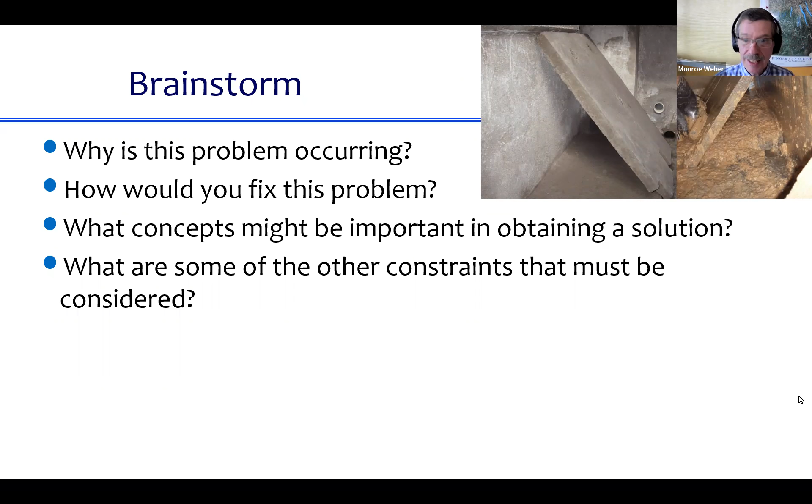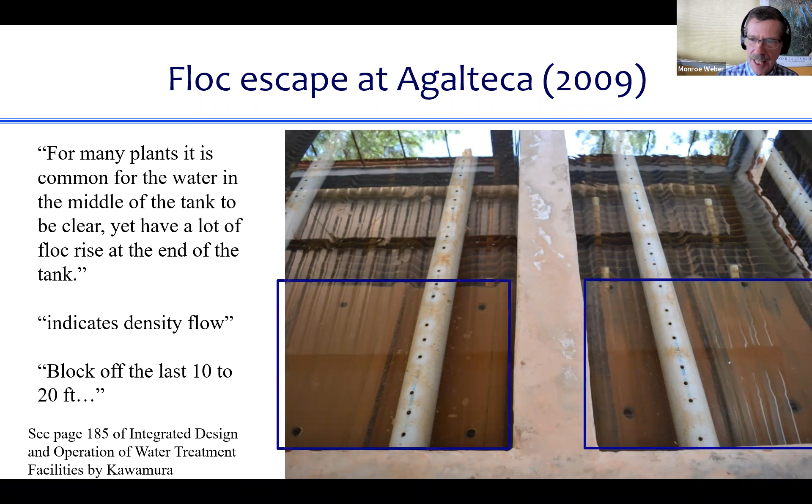So let's go on. This is another problem that happened in a water treatment plant. This is a view of the two sedimentation tanks looking in on the plate settlers at Agalteca. And the problem was that there were a lot of flocs coming up at the one end of the sedimentation tank. I know the image is not great, so I'm going to draw squares around what I want you to see. Look at what's right there. If you look really closely, that is two plate settlers laid on top of the plate settler modules, to prevent any water from coming up through those plate settlers. That's pretty puzzling, right? The reason they did this is because there were flocs coming up through those plate settlers, and so as a rational solution, they blocked the flow through those plate settlers.

And then I want to draw your attention to what I've written on the left there. For many plants, it is common for the water in the middle of the tank to be clear, yet have a lot of floc rise at the end of the tank. And that indicates density flow. And the solution is to block off the last 10 to 20 feet of the tank so that the flocs can't rise. And that comes from this textbook, which is like a top textbook used by consulting firms in designing water treatment plants today. And I want to point out that it's wrong. What happened is they assumed it was a density flow when actually it's not. But I also want to point out that this textbook recognizes this problem, and they don't actually have a solution for how to design the sed tank so that this problem doesn't occur.

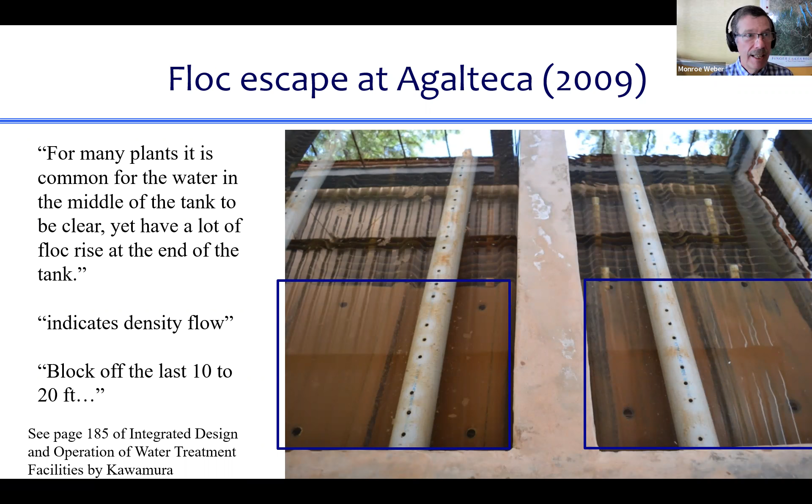So now I want to show you what we learned. We ran into this problem, and this became a student design project to try to figure out what was going wrong in this tank. They actually built a tiny little model of a sedimentation tank with the same kind of piping to get the water in and get the water out. And they ran dye through it, and there was this big aha.

I think the obvious answer is down, right? You think it goes straight down, because the holes are pointed down. That's what I thought. But the water doesn't know that that's what it's supposed to do. The water just does what's easiest. And so the water does this.

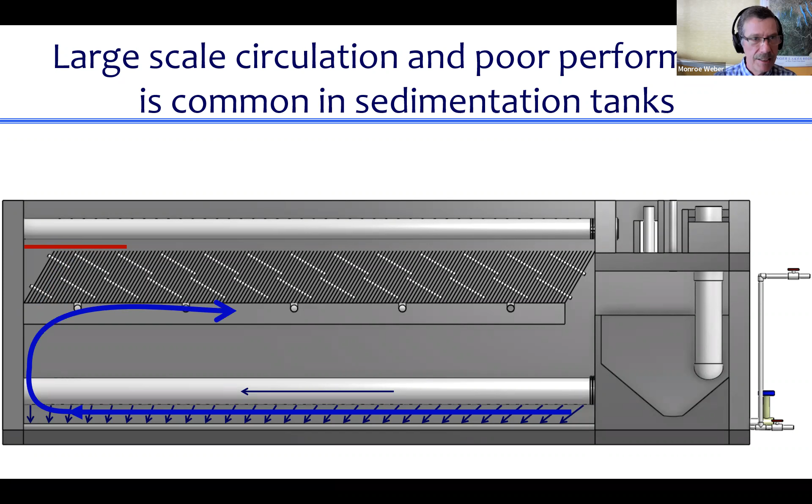And it's not about a density current, it's about kinetic energy. So, well, that's what we would like to have happen - actually no, that's what the plate does on top, but that's still a lousy solution. So the insight is that this is an inertia problem. This is an early attempt at solving this problem.

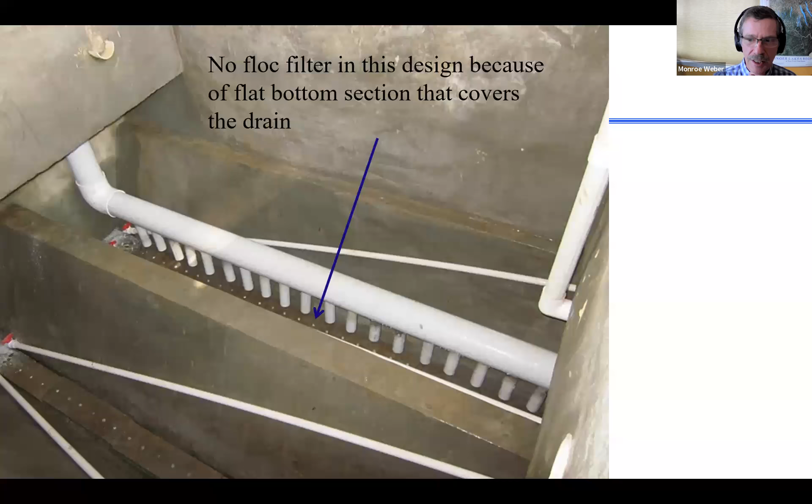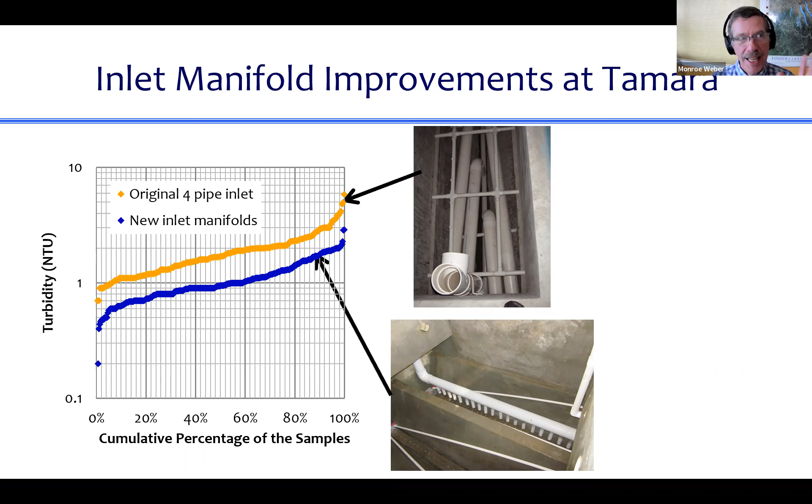So you see those straight pipes stuck on the bottom of the inlet manifold, and some early data suggesting that that switch actually improved performance of the sedimentation tank. The orange data points are from an earlier system - actually this is for an even earlier system that also had problems. Maybe the point here is that the improvements we've made did actually improve the performance of the plants.

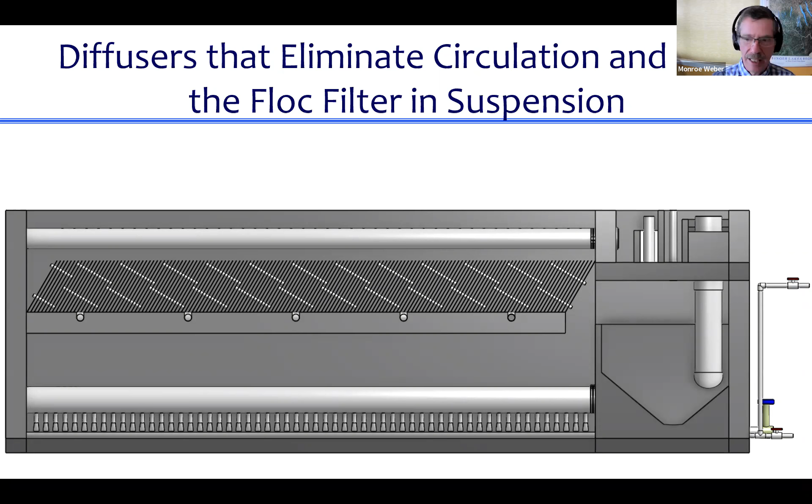This is the new design for the manifold for the inlets at the bottom of this sedimentation tank. I'll show you a couple pictures of how that's done. So the addition is those straight diffusers, pipes that straighten the flow and create a nice jet at the bottom of the sedimentation tank.

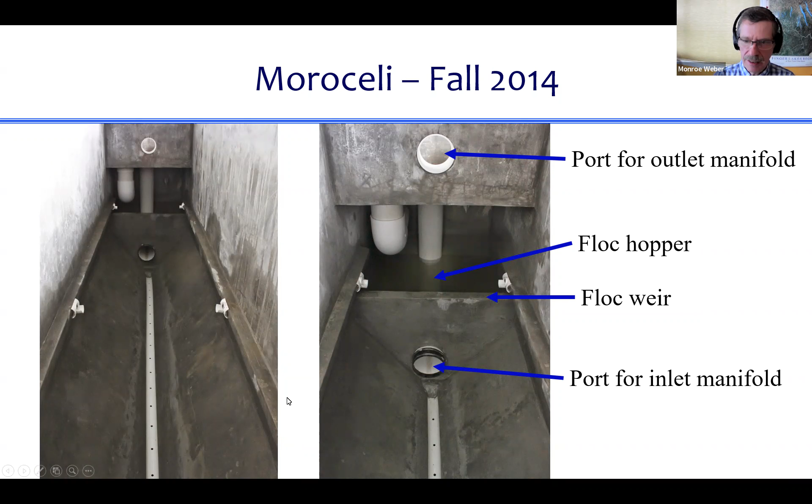So this is where the water leaves it. Let's start at the bottom. This is where the water enters the sedimentation tank, going into the inlet manifold. Here's the floc weir that controls the level of the floc filter in the bottom of the tank. Back in here is the floc hopper, where the flocs consolidate and form a liquidy sludge that's then wasted by opening up a valve.

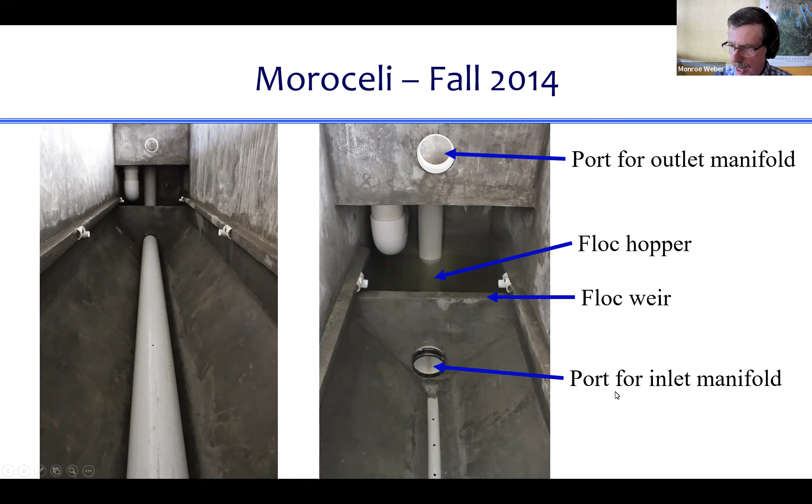And on the left you can see the whole bottom of the tank, and then I'll add the inlet manifold in here. So there's the inlet manifold added in. Let's look at how they fabricate these. So here they are fabricating one of these systems - they've got a drill press and they're drilling holes in the inlet manifold.

I'm just realizing there's holes on the other side of that inlet manifold. So this must have been a posed picture. I had never noticed this before, right? The holes are on the other side.

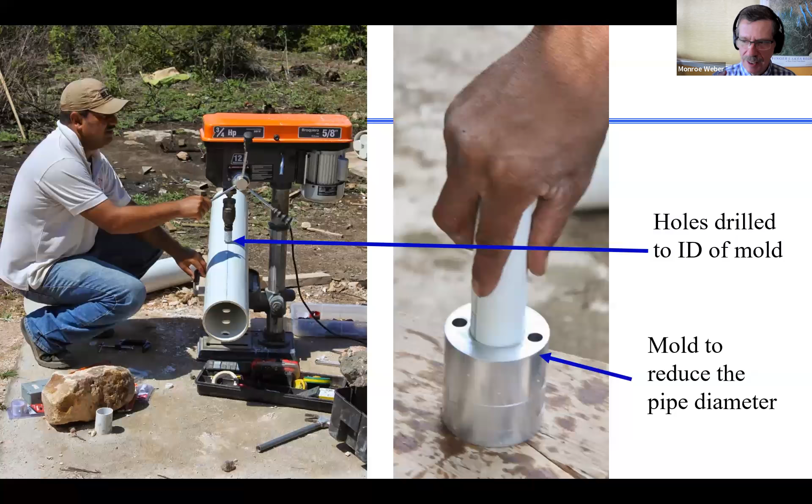So anyway, presumably he's not drilling a hole right now. But the holes on the other side, the hole diameter is equal to the inner diameter of this mold. And this mold is used to slightly reduce the outer diameter of the diffusers that get plugged into that pipe.

So I would love to have one of you talk through what you see in these photos. And I don't know who to pick on. Those of you who are not showing your video, I would love to see you. Oh, Isaac, would you be willing to share? Just tell us what you see in those two pictures and see if you can start telling a story of what's going on. You have to unmute. Yeah, just trying to take it all in. Yeah, it's okay, you won't have it all put together initially, but you can start talking and see where we go.

What's going on with that Voltech? Is that like a battery, or are they weighing something? Anyone who has an insight about what that might be, jump in. Is that boiling water to make the plastic more malleable and then it turns into smaller diameter? Easy to form? That was great, except it's oil because you needed to get hotter than water.

Back to you, Isaac. Yeah, looks like they're kind of going back and forth and making those bigger ones in the back smaller, like he was saying. Yeah, so where are they making them smaller? Inside the boiling, like the right picture, the boiling water, oil.

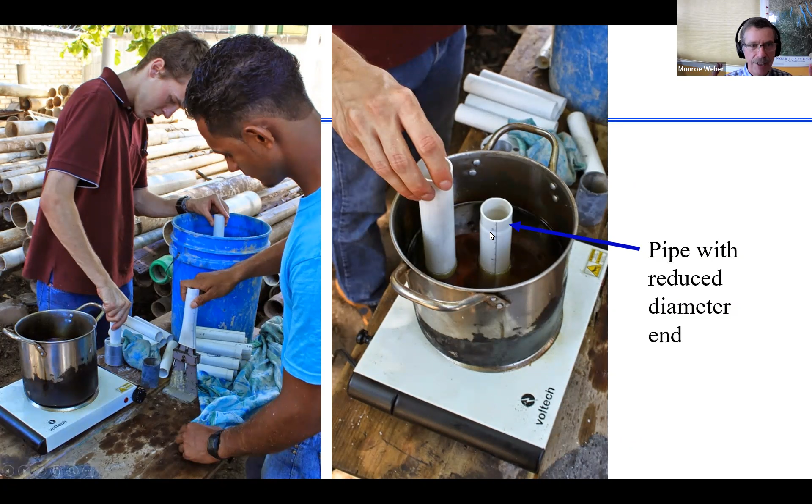One end gets smaller so that when you plug it into the manifold, it goes in so far and then stops. It goes into the place where it gets larger in diameter, and that makes it easier to glue it in and have it actually stay. Any questions about that?

And then just this notion that we keep on learning. So in the early designs, we had a drain below this jet. There were holes in the jet reverser to a drain pipe that was below that. And we very quickly realized that was completely unnecessary, and the jet reverser can be at the very bottom, and there's just a drain at the end of the tank, and that's all you need.

Okay. Other questions?

Let's talk about taking a floc filter sed system offline and returning it to service. This is what plant operators do, maybe every month or so, when they want to check what's happening in the bottom of the tank, make sure there's no accumulation anywhere. Maybe every 6 months there's a chance to clean the plate settlers, because some stuff does end up sticking to them over time, so you need to clean them occasionally.

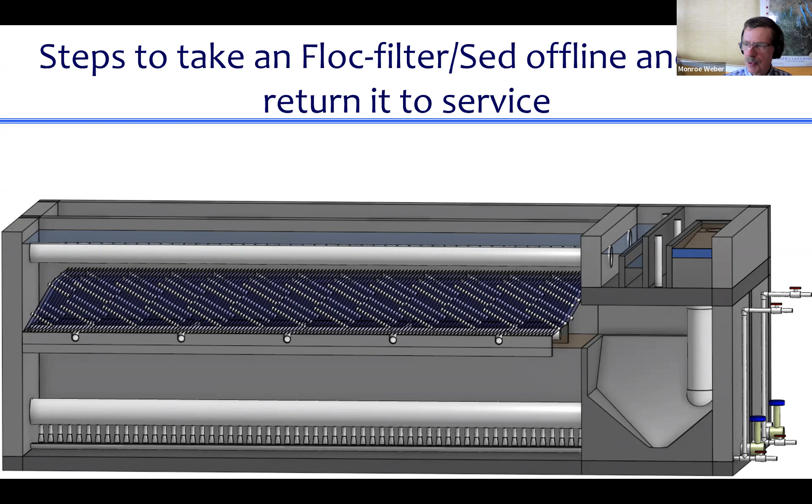Okay, so you need to take one unit offline, and this is what you do. The first thing is you see that red pipe? I added that red pipe as a little pipe stub in the inlet, and that prevents water from going from this inlet channel into the inlet pipe into that tank. So I just blocked the inflow of water.

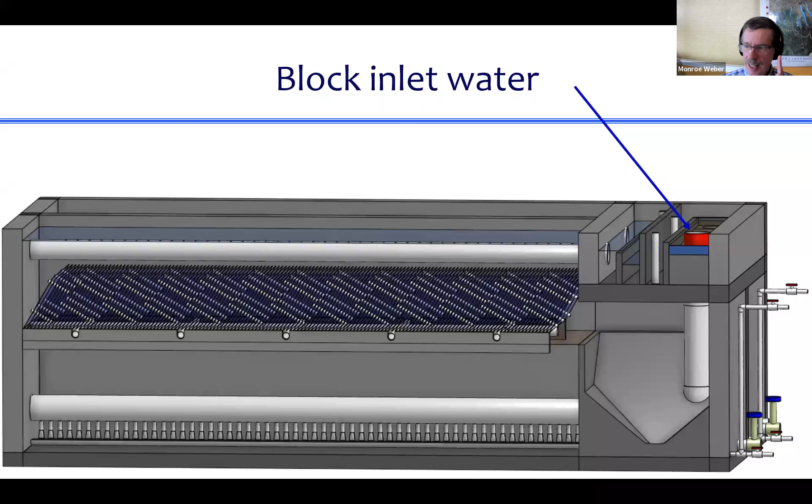And then I had to do one more thing. I have to block where water leaves, because if I don't, water will go from this tank over here, coming out here, and return into this tank when I try to drain it. So I have to block the outlet as well. So I blocked inlet, I blocked outlet, and I can remove the outlet manifold.

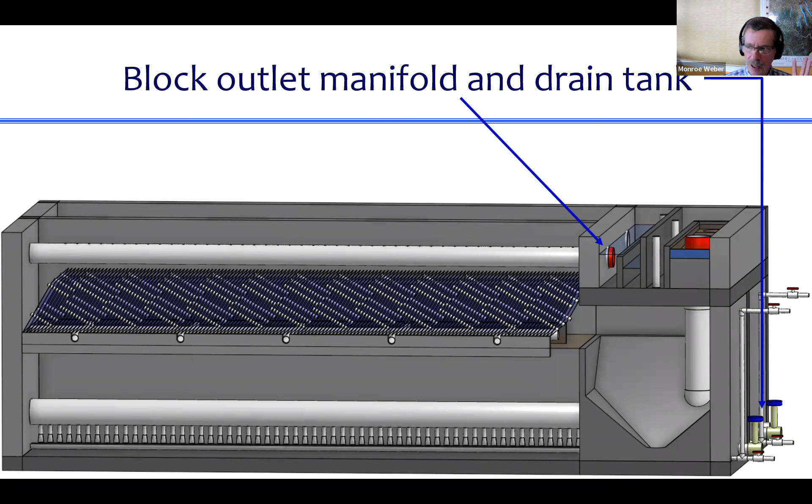Oh, I think I completely forgot something. You open up the valve to drain the tank. Now you can drain the tank because you have the inlet and the outlet blocked. Then as a next step, you remove the outlet manifold, you can remove the plate settlers, and you can do whatever you want to do.

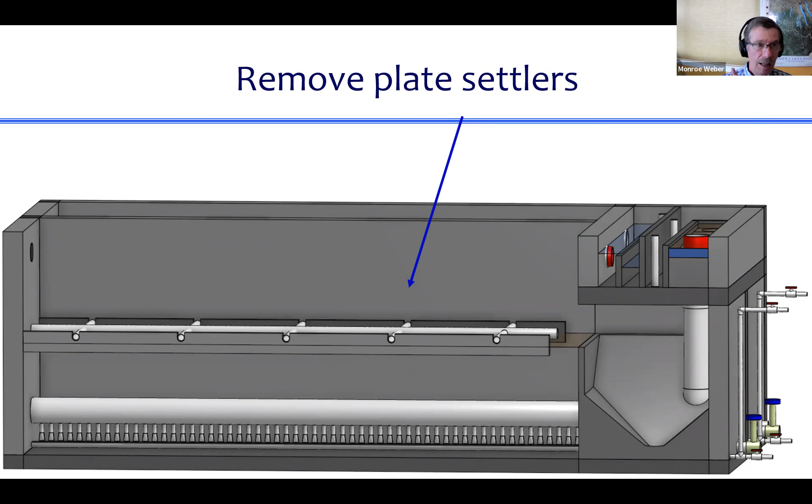And then let's put it back together again. Any questions? Okay, so we're going to put it back together. I put the plate settlers in, I put the outlet manifold back in. And now the question is, how should we fill this tank?

So what should we do next? You could take a minute to ponder this. This is where I wish I had you in little breakout rooms, but we'll just stay here. I mean, I think I haven't actually looked through that. Thank you, Patrick.

So you've got two choices for how you might fill this tank back up. You got a problem: the plant is running, the rest of the tanks are in operation. You'd like to fill this tank and get it back in service. The easy thing to do would be to open up this red pipe, remove that, and start dumping water into the bottom of the sed tank, right? It's a logical thing to do. Can anyone tell me what will go wrong if you do that?

You got some tanks over there that are full, you got one tank that's empty, you got this inlet channel coming in from your flocculator. You're going to open up this pipe. What happens next? Can you imagine? I know I'm asking you to do computational fluid dynamics in your heads. Completely unfair. But what do you think would happen? Anyone?

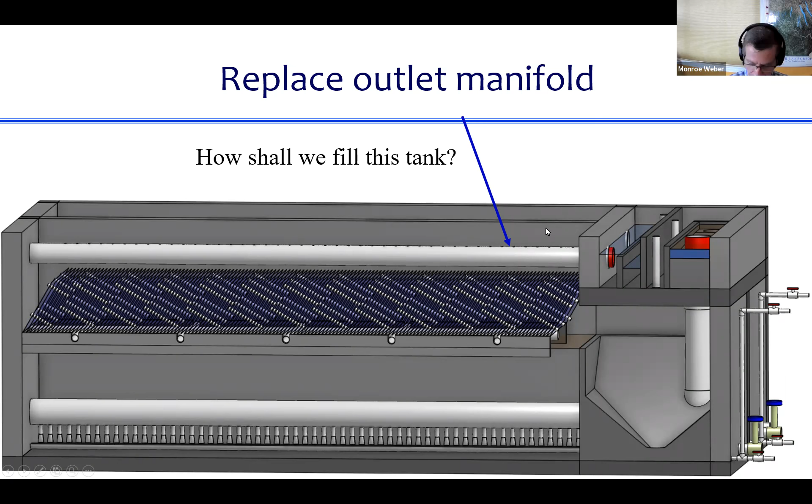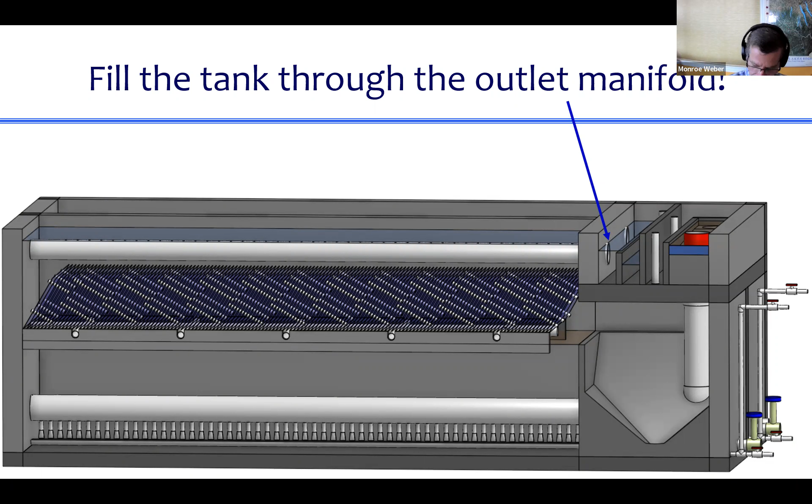And so the way we do that is we open up that port, and now our effluent launder, our pipe, effluent manifold on the top of the sedimentation tank acts like a little shower, and the water actually sprays out of it and fills up the tank. Eventually the tank is full, and once it's full, we turn it on by removing the inlet pipe stub, and it begins operation, full of clean water. So it begins operating well from the beginning.

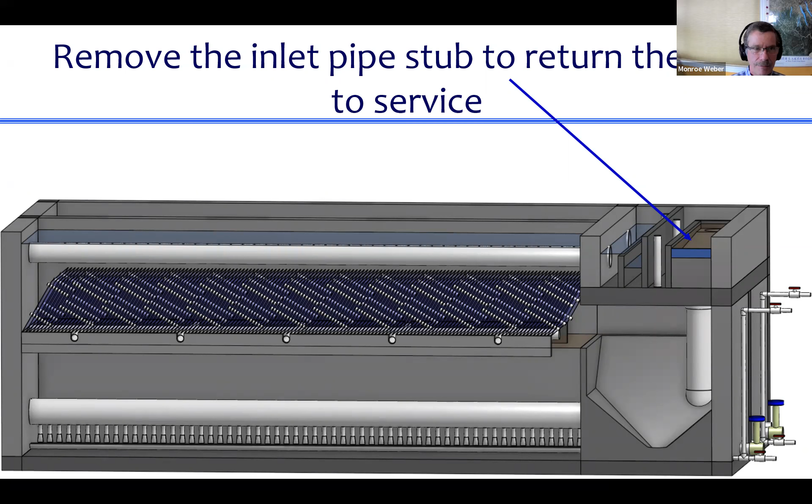Any questions? You would have to fill it up until it went all the way up to the entrance of the inlet manifold, wouldn't you? That's right, you fill it the whole way up. All right, good, okay.

Here's some questions for you to think about. Let's do them one at a time. As soon as you have even a simple response of why you think this is the case—why do we use plate settlers? Who can give an answer? Why do we get excited about plate settlers? Can you give a benefit?

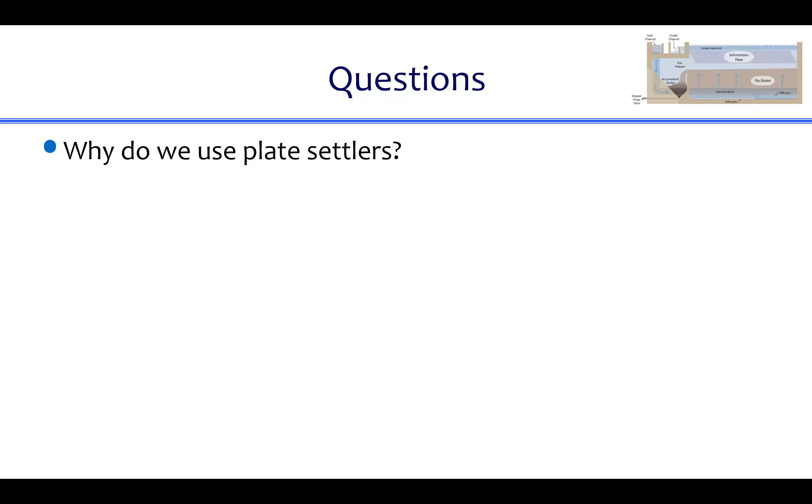Don't worry, even if you're wrong, I won't make you feel bad, I promise. Go ahead. Is it just so that there's constantly some ground for particles to be able to settle on? Okay, it does provide a surface where particles can settle on.

And we could have used the bottom of the tank as that place. Why did we want to put plate settlers in? So they don't have to go as far down? You know, that's interesting. There's some truth to that.

There's another really big advantage. Is it so they can, with their incline, fall back down to recycle through the rest of the sedimentation tank to take on more particles? So, you know, that is true. That's actually pretty important for our system.

But anybody remember what it was? Reduces the velocity. Okay, given which velocity is reduced? Like the velocity at the entrance, when it enters in. Maybe not so much, because remember I said plate settlers don't actually have any significant head loss. So if the water is coming into the tank, the plate settlers aren't going to slow it down.

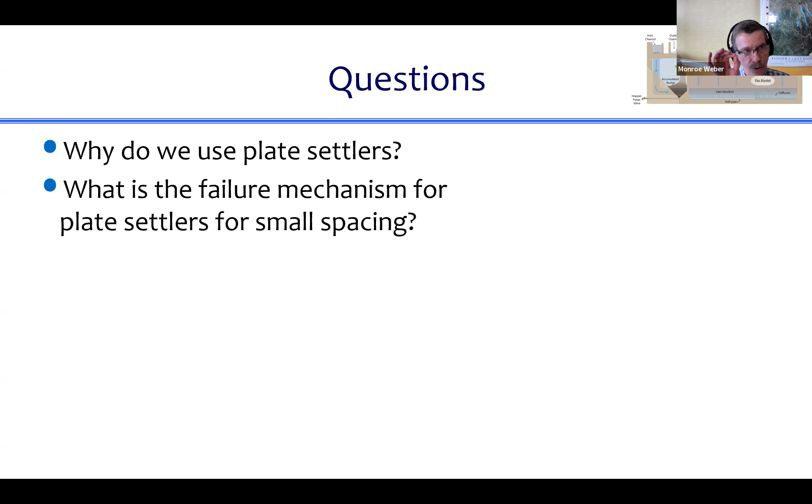That means a flock close to the wall is experiencing a high velocity because the flock has actual dimensions, it's not infinitely thin. So at some point, when you bring the plates together, the flock goes up instead of going down after it settles. That's the failure mode we have to make sure we don't hit — we don't want plates so close together that the velocity gradient is so high that the flock near the wall experiences too high a velocity, carrying it up.

The flocks that are in the floc filter, where were they before they got to the floc filter? Where did they come from? They all came from the raw water and from the flocculator, but where did they come from most recently? Somebody already talked about this — it was the animation from weeks ago, at the very beginning of this talk about sedimentation.

There were green flocks and red flocks and blue flocks. The blue flocks are in... go ahead. Was that the floc hopper? Blue flocks do end up ultimately going into the floc hopper, that's like the exit, that's where all the dirt leaves the system. But where did the blue flocks that are in the floc filter come from? How did they get there? Is it the inlet tube?

You're right, they came in the inlet tube, and when they were in the inlet tube, what size were they, or what color were they? Remember? They're small, weren't they? They were small, they weren't as big as the blue ones yet. So what did they do? They were green ones, small green ones. What did the small green ones do?

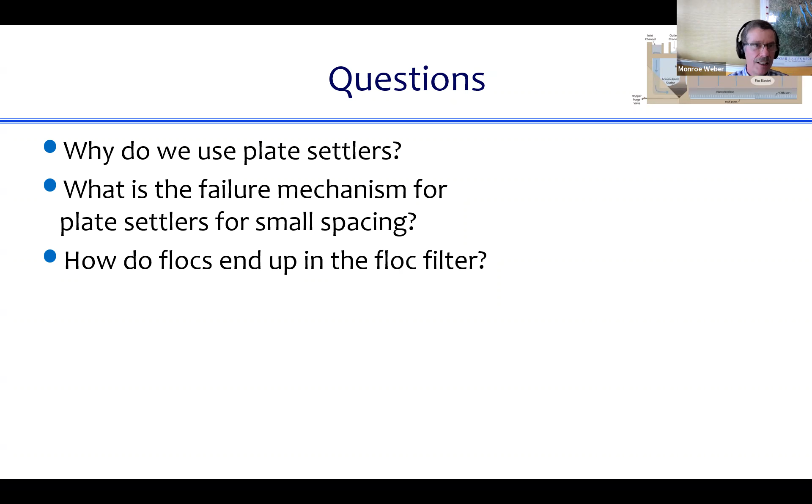Go ahead, Victor. Technically, they'd slowly coagulate and then fall down, and eventually end up in the floc hopper. You're right, I'd use the word they form an avalanche — and they aggregate as they're in that avalanche, and as they're falling down, they're bigger guys, and they settle faster, and ideally they hang up in the floc filter for a while, and at some point they end up going over the weir into the floc hopper. Good.

I have a quick question — does the orientation of the plate settlers to the floc hopper matter? No. You think of the floc weir like a dam. It is a dam. It's just that you're used to a dam holding back water, and above it is air, above the water is air.

It's another fluid, right? A low density fluid, air, on top of a high density fluid, water. The same thing happens at the bottom of this tank — there's a floc suspension that is high density, and above it there's water that is low density. It's like water and air, floc suspension and water. So the floc suspension flows over that dam just like water flows over a dam.

Just that the density differences are so different between air and water and a floc suspension and water.

This next question: how fast does the floc filter settle into a pile of sludge if you turn the sedimentation tank or this whole system off? You turn off the water going into this tank. How fast do the flocs in that floc filter settle down and form a pile of sludge on the bottom of the sed tank? What's their velocity downward if you turn the water flow off?

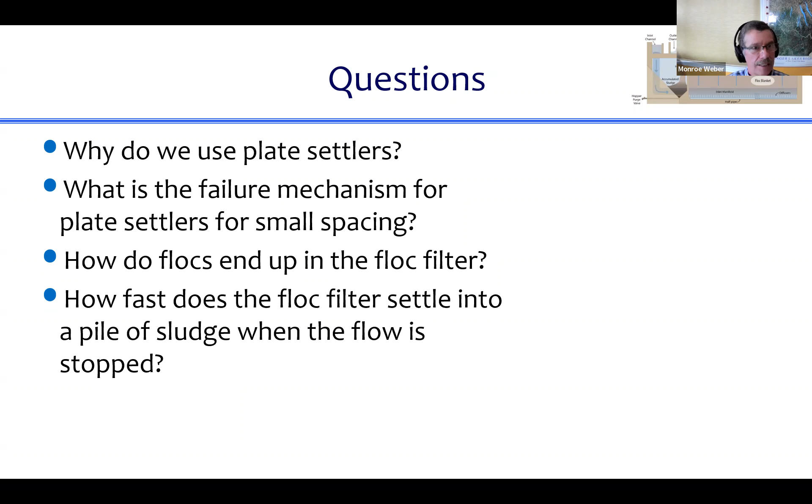And I think our timing is good, and I think this must be the last slide. Is that right?

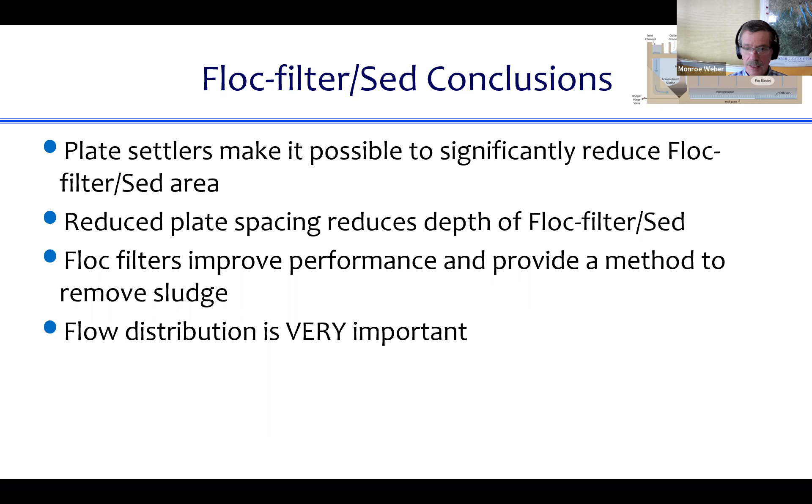So many things. There are still lots of opportunities to learn more things. I just want to leave you with that notion. We are not done yet. Water treatment is not a completed science. There is still lots of opportunity to learn new things.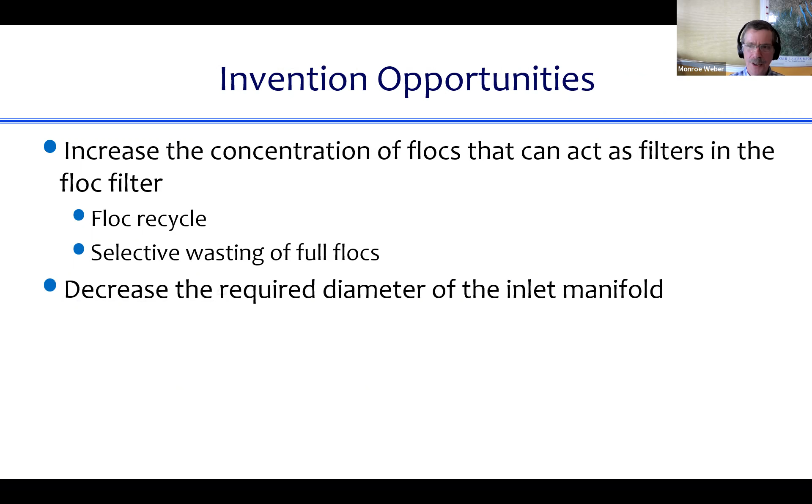Let me just, I could, for like 2 minutes. Water treatment plants have a very difficult time knowing how to set their coagulant dose. People have been trying to automate that process for many, many decades and have largely failed. To the best of my knowledge, no one is really succeeding in pulling this off and having it work well.

So we're working on this one too, trying to figure out: could we get a signal from within the water treatment plant that would give us a good indication of whether or not our coagulant dose is right or not? And the little insight that we have is that the only real place where you can get this is how clean is the water after it settles. So our trick is...

Grab some water out of the flocculator and run it through a little sedimentation tube as fast as we possibly can, and then run that water into a particle counter so that we can see what the particle distribution is, and then use how many particles are coming out in the particle counter of the settled water as a guide to our coagulant dose. And we're gonna try this at the Cornell water treatment plant, where they have a sedimentation tank that has a 4-hour residence time.

And so there's a huge delay before they get to know whether or not they succeeded in having the right coagulant dose, right? It takes 4 hours to go through the sedimentation tank. This system will have a residence time of something like 15 minutes maybe. And so they'll get a much faster response, and they'll be able to not be so far behind in making their coagulant dose changes.